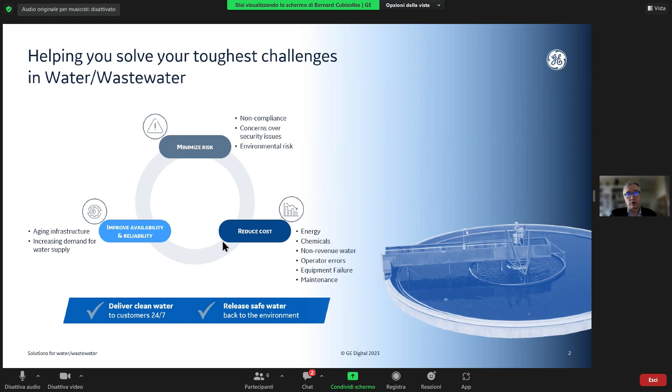So there are more behind each of these buckets. And what I wanted to do, back to your question, Francesco, is show you how we can help water companies save money and make sure that they have a reliable application. So my next slide was about the applications that we serve. So I encourage you to go to our website. We have a lot of applications that we have documented.

So we've seen this, I would say, the requirements changing over the years, but fundamentally, I think that the main sort of challenges are the same for our water wastewater customers. And what we've seen changing over the years is that we've had obviously more technology at our disposal to help you solve your challenges. And my point is that it really starts with data.

So if you want to talk about digitalization and what Francesco was calling Water 4.0, you look at data and you see that this is foundational. So there are different steps in processing data. It first starts with collecting data.

A lot of applications and plants in Europe are pretty old, so they don't have a lot of instrumentation. And this is the challenge for many people, including for you, I guess, on this webinar, that collecting data can be a challenge because of the nature of the applications. Maybe they are remote applications or remote equipment that is not equipped with sensors, but also due to the fact that this is really spread around, let's say, geographically spread, and this is the nature of the business, by the way.

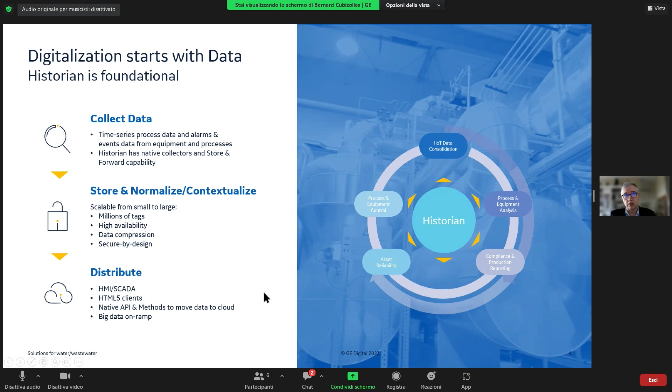What we've seen, and what the technology now allows us to do, because we have these nice remote clients, and SCADA is not what it used to be, it's more flexible these days, is that there's a need for consolidating what used to be islands of information. So I have some examples of applications that are fairly remote, like reservoirs, which are pretty far from the main SCADA in the main plant usually. The idea is to consolidate and create a unified view, even though they could be separate entities, like the reservoirs, wastewater collection, water treatment plants.

If you want to have a global view of what's happening, the next step in digitalization is probably to try to have a unified SCADA, at least from a control point of view. So I think having more accessible tools, democratizing them so they're accessible throughout the entire organization, really helps.

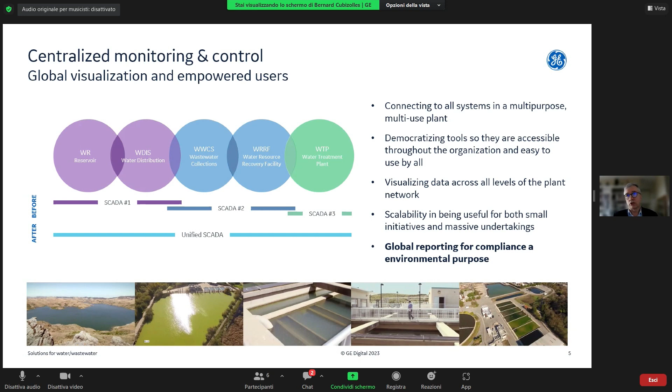That gives you a very easy and instant outcome, which is visualization across all the plants and the network. That allows you to do some global reporting, which is priceless when it comes to compliance and environmental reporting, for example.

And that goes through a concept we've developed, which is about connected workers. Connected worker means it's not only about being connected to the application from the control room, which was the case years ago. The control room still exists in many applications, but people want to have access to the information where they are and in context.

So that's, for example, having access to information in the field. That could be through your smartphone, maybe a PC connected through Wi-Fi or a radio link, but also from home. We've seen with COVID that there's a need for workers and all the people in the chain to be able to connect to the applications.

So we developed very early, as far as this goes, tools that allow you to do control from anywhere in the world basically, and connect to applications. And that goes together with something I just want to highlight - it's about the high performance HMI.

The goal is that people can easily recognize what's happening and if something bad is happening in the application. That's what we've developed over the years. The high performance HMI is what you see on the right side - not having Christmas trees on the screen, but very simple, easy to understand screens and visuals for the operator. That means less time spent navigating.

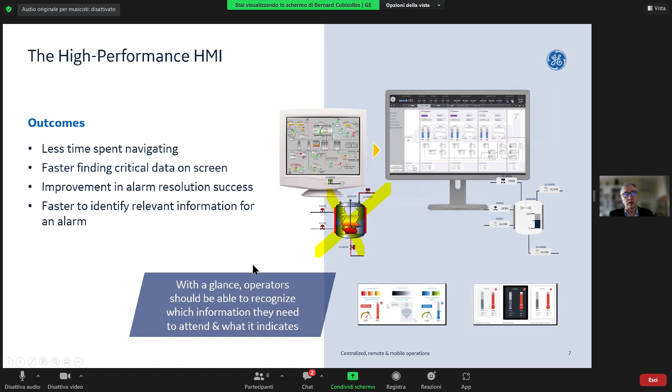And mobility is part of it. Mobility speeds up troubleshooting. You see here a real application on the right side - that's Haverhill on the east side of the US, the East Coast. We've been one of the first companies introducing this kind of tool for operators. They're using iPads, and they can connect to the system wherever they are, even outside the plant.

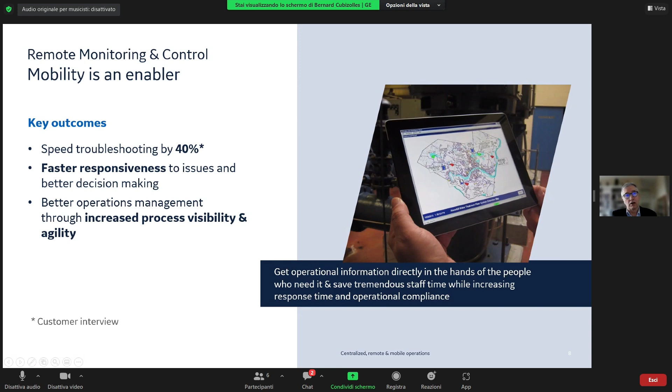So the idea again is to get the information directly in the hands of people who need it, and the right information, so that they can respond to alarms, maintenance issues, etc.

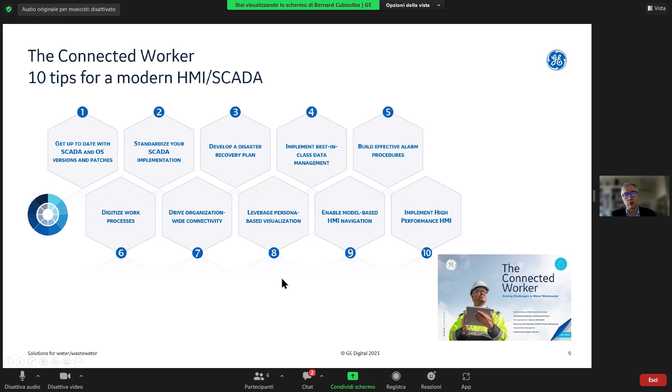So we've developed a guidebook for you to use. If you want to know more, it's available from our website. It's called The Connected Worker, and it covers tips on making your SCADA more secure, implementation, alarms, digitizing work processes, up to implementation of high-performance HMI. It's a really cool guidebook, about 70 pages describing in detail what I just mentioned in the past 5 or 10 minutes.

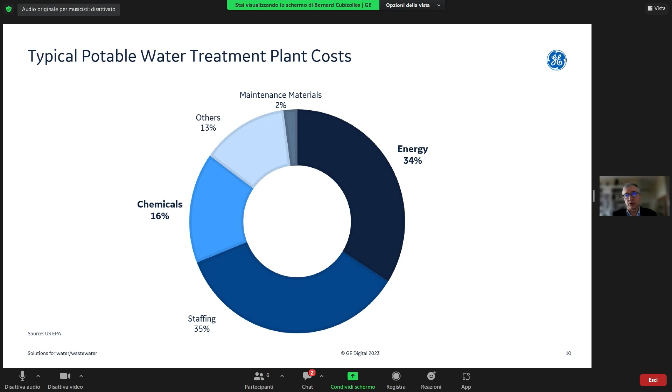So if we want to talk about costs specifically, this comes from the US, but I don't think it's very different in Europe. The main costs about water treatment in the plants are energy, staffing, and chemicals. There are two aspects where we, as a software company, can add value and where software can help: energy and chemicals.

So I was talking about collecting data, and we've developed this virtuous circle about connecting, collecting, archiving, monitoring. A lot of applications today go across this arch, which is about automation, visualization, and monitoring. But we believe digitization means you have to go further down the road, analyzing the data, predicting what's happening, and at the end, optimizing the applications.

A lot of people do the first part of the journey because they have to, for regulatory control purposes. They collect data and need to show the regulatory organization what they are doing, that they're doing the right thing for the environment. But very few people take the extra step of analyzing the data and trying to optimize the application based on that analysis.

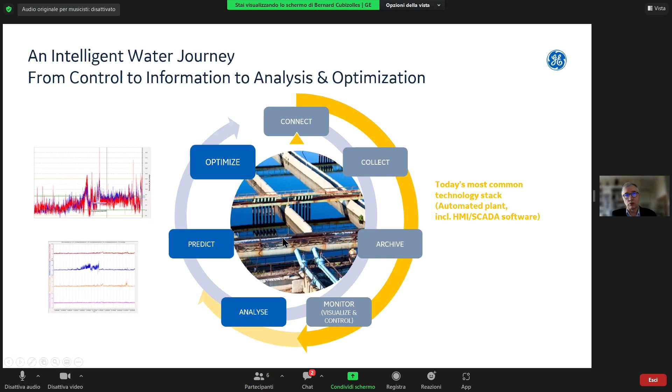So a couple of applications we've developed across the world—this one is in the US, but we also have some in Europe that do the same—it's about trying to predict what's happening, building a model of what's happening in real time and what has happened, and then applying it to the real-time application.

So basically collecting data, getting this data and connecting it to have centralized monitoring and control. And the important piece is being able to predict what will happen based on the influent quality and some critical parameters, with a product that's off the shelf.

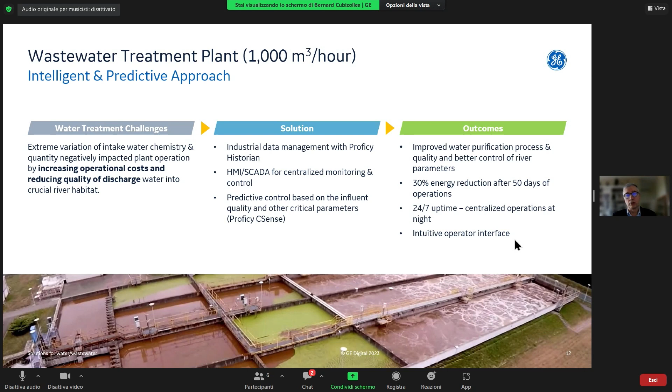What we've done that's pretty impressive with this customer is we improved the process and worked on what's the most cost-effective level, which is energy reduction. They experienced a 30% energy reduction after 50 days of operation, which is absolutely huge. In the meantime, we developed a new interface so operators can work better with the application. That's one application, a small one.

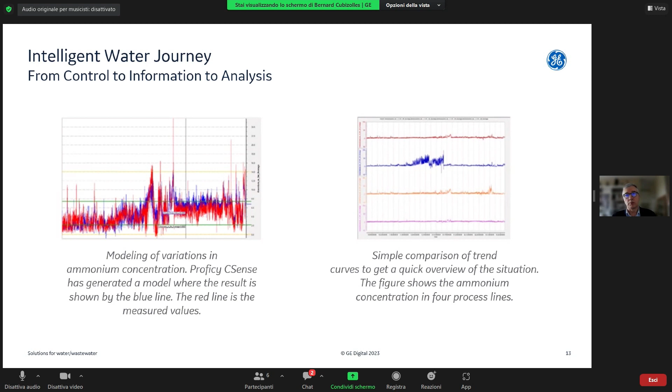So the intelligent water journey goes from control to information to analysis—creating a model of the application, and then in real time you compare what's happening against the model. The idea is the model can see things and understand what's happening better than human eyes. Human eyes can really only see the current status, a snapshot. A good operator might see some deviations, but only minor ones—optimization can only be achieved through software.

There's one that's really interesting, very specific about biochemical oxygen demand—if you're in the water business, you know what that means. It's really about reducing chemical consumption at the end of the day. Same thing, we've developed a model. Instead of going to the lab and waiting for results, which usually takes a few days, to predict or understand the BOD demand, the BOD estimation, the system can do it in almost real time, so you can anticipate what's going to happen.

And there are two outcomes here. One is about avoiding compliance issues, so making sure that what you release into the environment is clean.

And that's associated with some fines - in this case, that was about $100,000 annually. Number two is even more important: a reduction in chemical consumption. Depending on the plant, that can be between 17...

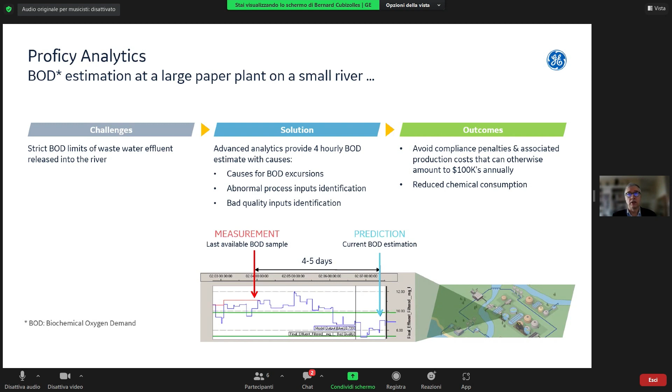I have an example in France that reduced chemical consumption by 17%. People thought that wasn't much, but I think that's a lot at the end of the year. It could be up to 20-25%. In this case, it was more in the range of 20%.

Last but not least, there's something you can do with analytics - digitalization can help in different aspects of operations. One is managing alarms in a better way. We've done interviews with different businesses in Europe and the US, and a lot of people think managing alarms is still a big challenge for them - for example, having operators running around to fix false alarms when there's nothing to fix, while also needing to react to real alarms really fast.

So the objective with advanced analytics, and with decent digitalization implementation, is to reduce the number of alarms. We've done this in many applications, reducing alarms by 75%, which is huge - for example, reducing alarm cascades. When an alarm comes, you often have linked alarms, and we reduce this to a single alarm for the operator, also using machine learning to look at the raw alarms in the system.

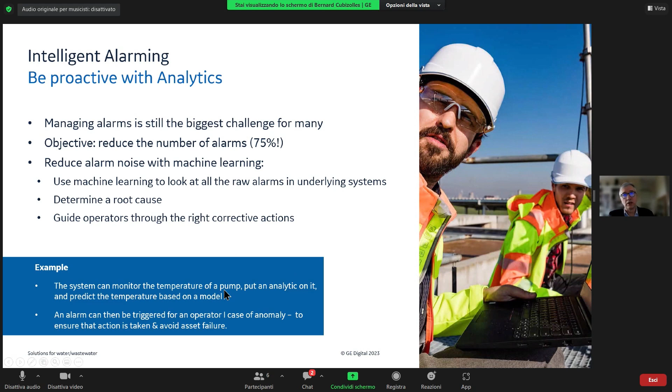As a quick example, you have alarms that come from values going up and down against the bandwidth. What you can do is run statistics on these alarms and understand the root cause - it could just be an asset behaving in a funny way. We've done this with specific equipment like a pump: if you apply specific analytics looking at temperature or vibration, you can trigger alarms that detect an anomaly rather than relying on an operator hearing noise and realizing something's wrong. The system will tell you in advance, which may avoid the pump failing, so you can take the right corrective actions and be proactive with analytics.

So as a conclusion, technology allows us to democratize all these tools. That gives you greater access - with SCADA, faster response time, with alarming, operational agility basically. The analytics are priceless - they allow you to go the extra mile, giving advanced warning and more decision-making information, so you can make informed decisions.

On the other hand, you have the deployment of tools today around remote access and mobile operations, which reduces operations cost. I have an example in the north of the US where people developed this mobile approach to solving problems, and they got their money back in really 3 months, because people didn't have to drive - reducing the time spent in their car and the costs associated with travel.

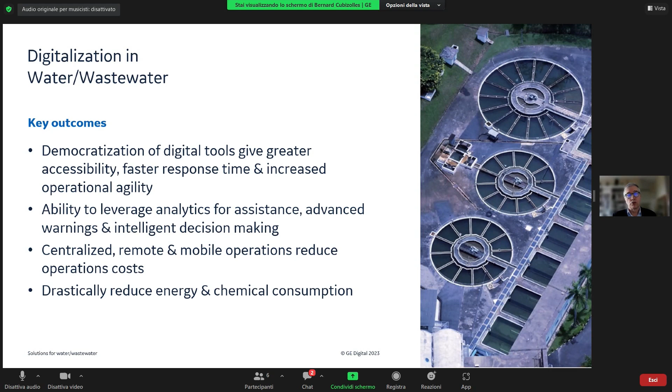Last but not least, we can work on the two main levels when it comes to cost reduction: energy and chemical consumption. We've seen drastic improvements in these two fields using digital tools, whether simple analytics or complex analytics affecting an entire asset. So in a nutshell, that's what I wanted to share about digitalization and the tools we can develop to improve all these KPIs.